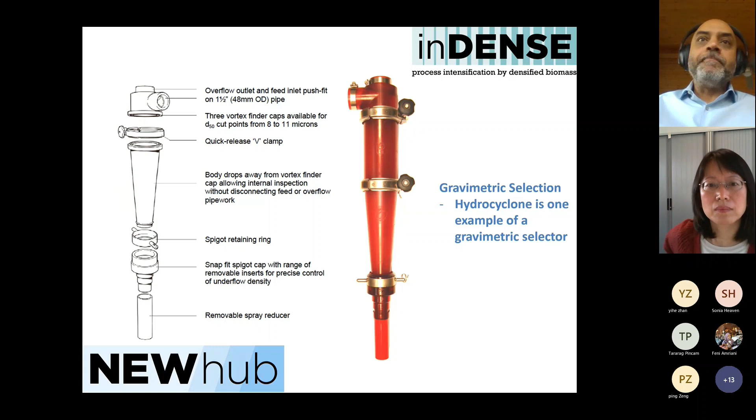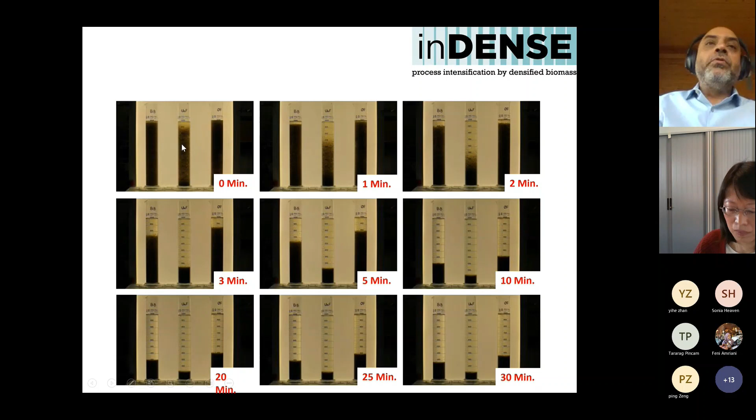We try to waste—in fact, we waste the overflow relative to the feed and the underflow. In 30 minutes you can see the difference as well, but you can also see the difference in 5 minutes.

Selective sludge wasting, which is what this is by physical classification, can promote aerobic granulation in almost any existing plant configuration. There are tens of thousands of CAS, continuous flow activated sludge facilities already built worldwide. There are IFAS systems already built worldwide, sequencing batch reactors, membrane bioreactors—so there's already this existing infrastructure.

So how do we actually use something like this, which is a hydrocyclone with a skid, to improve capacity by between 20 and 30%? Typically it's around a 30% increase in capacity of a plant. There are nearly 80 implementations worldwide for a technology that we've launched only in the past 5 or 6 years.

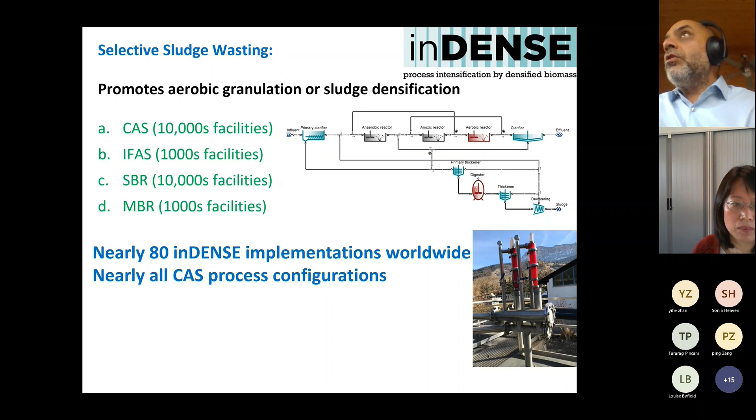So where does one place the hydrocyclone unit? One can put the unit in the waste stream. Let's assume you have a continuous flow activated sludge process with an anaerobic selector, or maybe even just simply an anoxic selector. One would eliminate the regular waste stream, take a small amount of RAS, typically 150% of what you would need to waste. The 1x will go into the waste stream, and the remaining 0.5x is returned. That contains the dense material.

But really what we are doing is out-selection. We are out-selecting, or deselecting, the poor settling material. By deselecting it, we are hopefully retaining the good settling material.

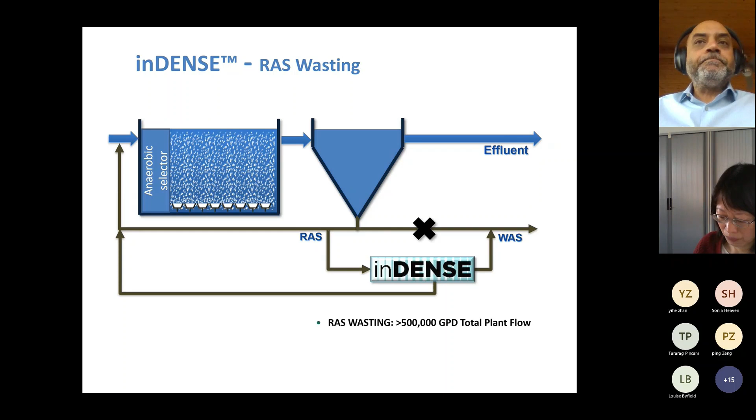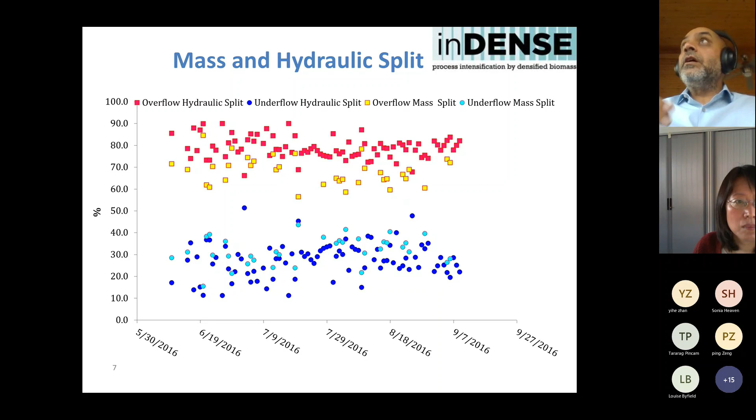This one shows the typical hydraulic and mass splits associated with our approach. You'll see that about 70% of the flow is in the overflow, and about 30% is in underflow, giving that 1.5 factor that one needs to manage into the hydrocyclone system. So if you know your waste volume, then it's very easy to design this hydrocyclone system.

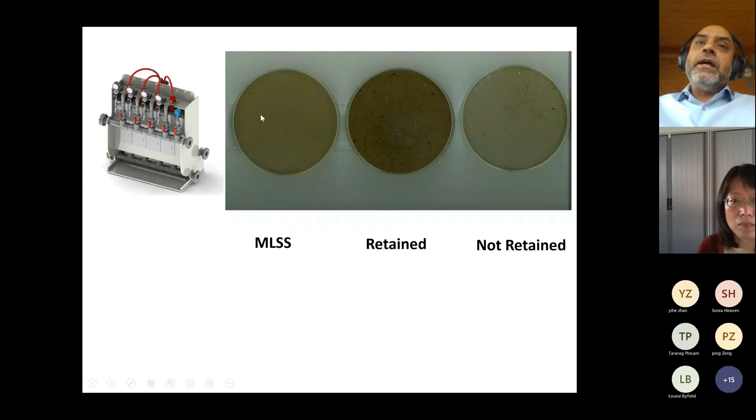And you can see in this PowerPoint slide, the granules are retained in the underflow. It's very fine flocs that go out in the overflow, sometimes filaments, depending on what your objectives are, and the mixed liquor in the feed.

Our approach is not to try and maximize aerobic granulation. Our approach is to try and get a floc-granule, what I would call a Goldilocks approach. We don't necessarily want to operate in a fully granular approach. We don't believe that's what we should try to achieve.

But we do try to achieve one, SRT uncoupling. That means the low SRT organisms might be present in the flocks in a properly designed system, the high SRT organisms in the granules. So it's very much similar to how an IFAS is operated, where the higher SRT organisms are on plastic media. Here, the higher SRT organisms are in the granules. The low SRT organisms are in the flocks. So it's this combination of floc-granule approach.

What we want to do is improve the mixed liquor solids. So we want higher MLSS inventory in the process. That's an objective, and one can do that by improving the settleability of the process, but we also want more active mixed liquor suspended solids. By doing this SRT uncoupling, we would have the ability to manage the active fractions associated with what we want to support in our process.

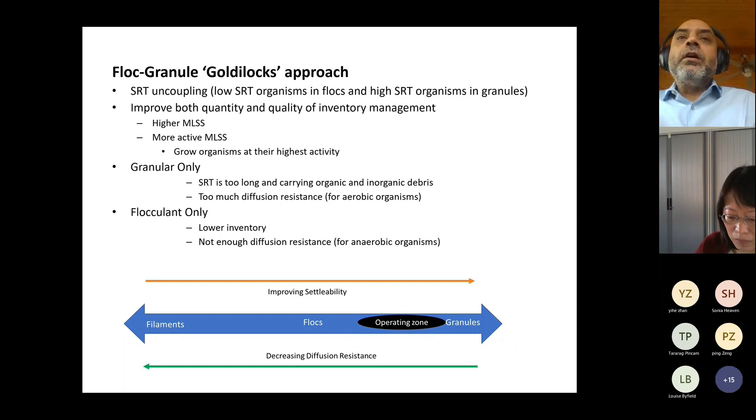Typically, we could have somewhere in the order of 2 parts granule to 1 part flock in our inDENSE systems. And our SRT uncoupling could be such that the SRT of the flocks could be in the ballpark of, say, 5 days, and the SRT of the granules could be in the ballpark of 25 days. So that's the uncoupling that one could envision.

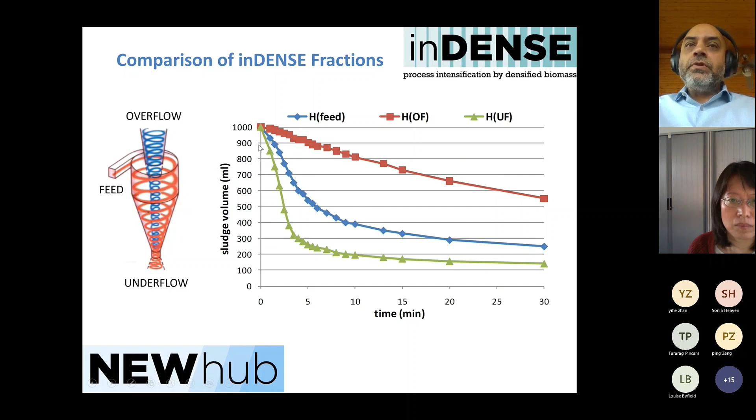This is an SVI test where we have 1,000 mils of mixed liquor being subject to settling, and the feed is in the blue, the overflow is in the red, and the underflow is in the green, and you can see the difference.

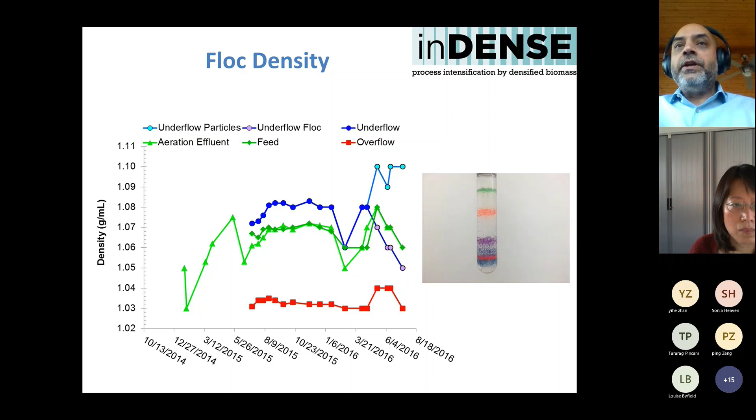This is the sludge volume index at one of the plants in Soyen. This is somewhere close to Munich in Germany, where the blue is the feed, the red is the underflow, and the green is the overflow.

Over time, many folks ask, if I'm wasting bad settling sludge, will my dewatering be impacted? But in reality, that's just a transitionary period. Over time, the overflow SVI actually is better than sometimes the feed SVI. So over time, the SVI gets better for all three fractions: the feed, the underflow, and the overflow. While the feed SVI could get down to 60 milliliters per gram, the overflow SVI is also not too bad, in the 150 milliliters per gram range or so.

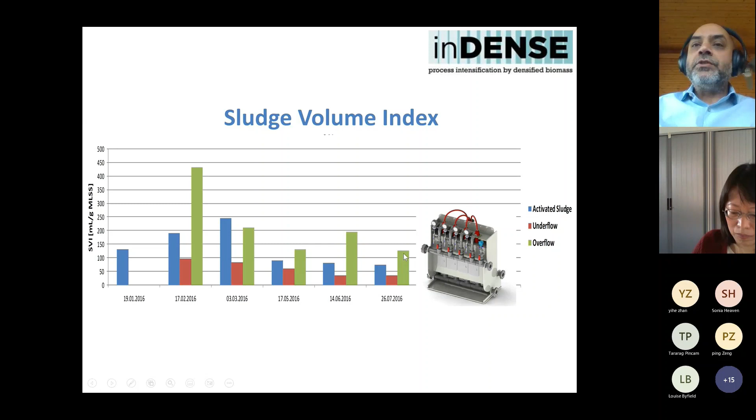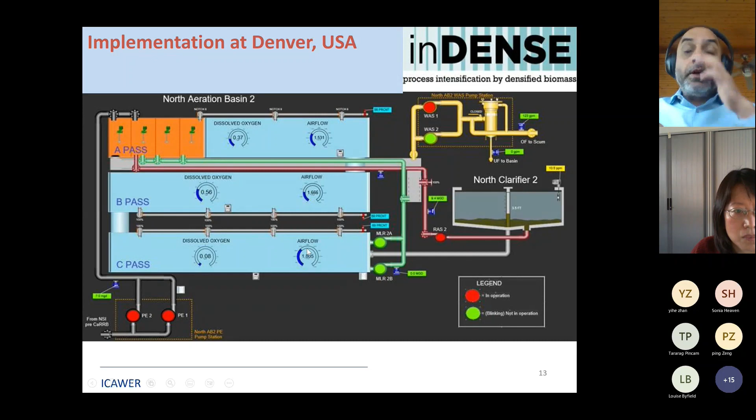We've implemented inDENSE in an A2O configuration, and this is an example of an A2O type configuration in Denver, where we have an anaerobic zone, anoxic zone in the first 2, and then the aerobic zone in the rest of the process.

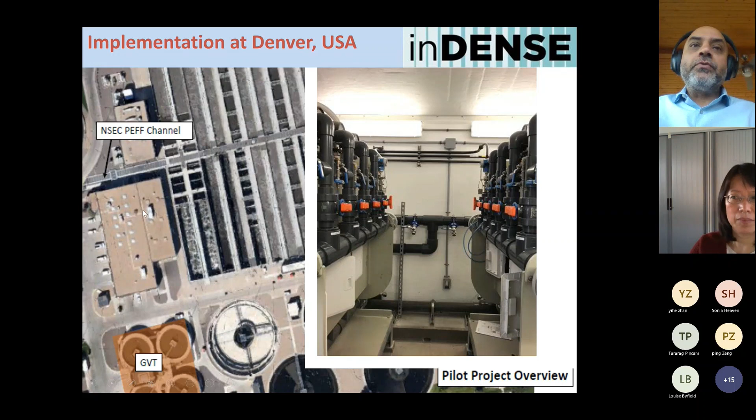And these are the hydrocyclone skids in Denver. There are 8 of these hydrocyclones in that skid for this train.

At this plant, what we see is, for example, there's a control train, the full-scale AB4 SVI, which is in red, could be as high as 160 or 180 milliliters per gram. And then as we start the inDENSE, you can see the SVI starts dropping, down to anywhere between 60 and 80, sometimes 100 milliliters per gram, depending on what your starting SVI was.

What you also see, which is important to note, is an improvement in the clarifier blanket levels. The clarifier blankets go from, in this case, as high as 3.5 feet to below 2 feet. And in almost every plant we've operated with inDENSE, we see our clarifier solids concentrations, our thickening function, improve.

So our clarifier solids concentration increases. At our plant in Strass in Austria, the solids concentration in the underflow is as high as 1.5 to close to 2%. And so what that does is you recycle less water, so you can reduce your RAS. Typically our RAS can go down to between 25 and 30% of Q.

By reducing your RAS flow, you actually increase your driving force. You increase the hydraulic capacity of your process because now you're sending less RAS flow, and so your forward flow can compensate for that, as well as your driving force. It's less dilute, so the driving force of your substrate to get into the granules improves. So not only do we improve the SVI, we improve our thickening, and those are actually complementary and create that virtuous cycle.

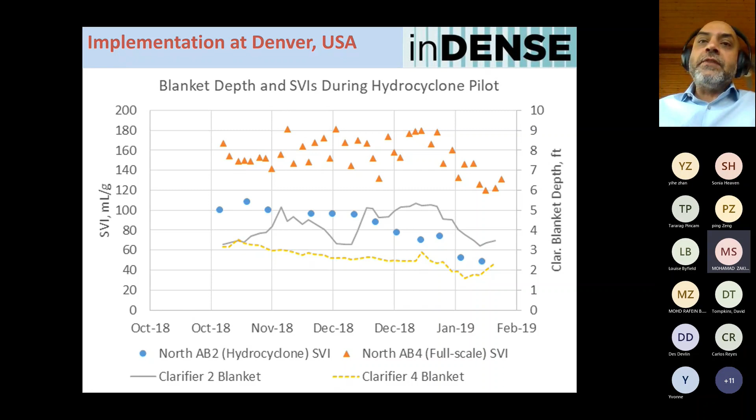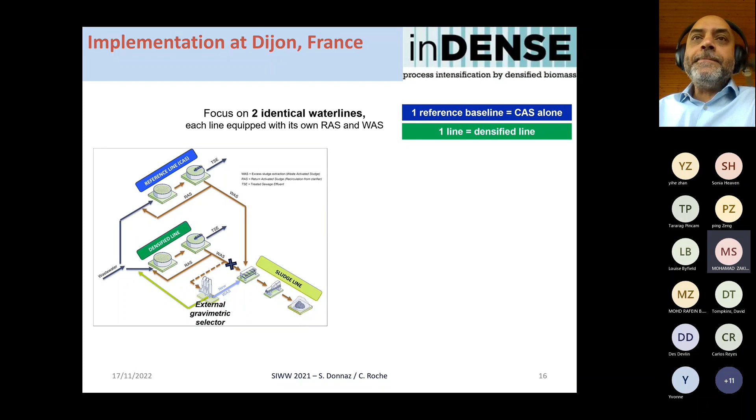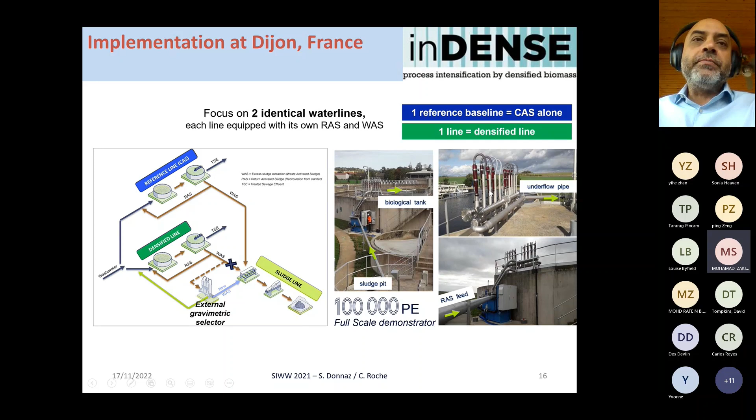This is an example of another A2O plant in Dijon, France, where they had a control line and a densified line. In this plant, you can see the hydrocyclones in the top right portion of the figure. It's an oxidation ditch plant with an anaerobic selector.

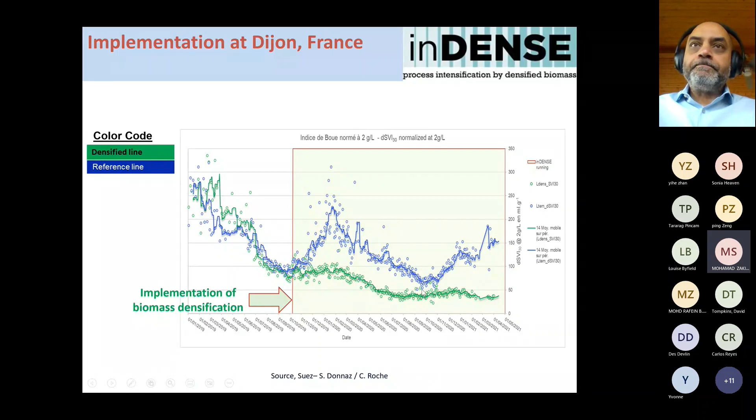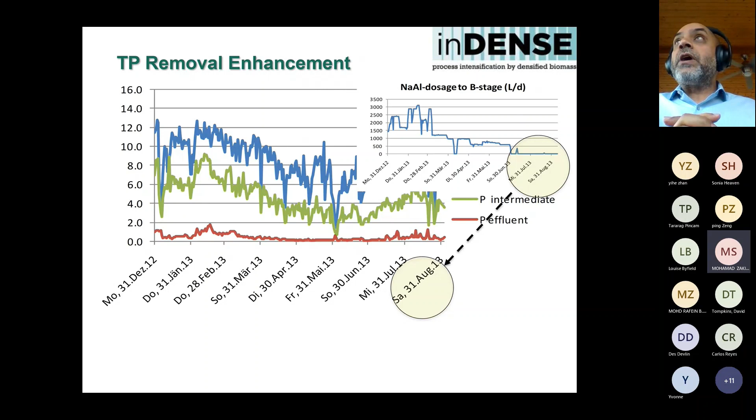We've implemented inDENSE in combination with using chemicals such as aluminum. We have a plant in Ephrata, Pennsylvania, where we add chemicals and do BioP simultaneously in the process to get low SVIs. We don't have too many of those applications, but we've even implemented inDENSE under conditions where the phosphorus limits are quite stringent, trying to manage both BioP and ChemP in the same plant.

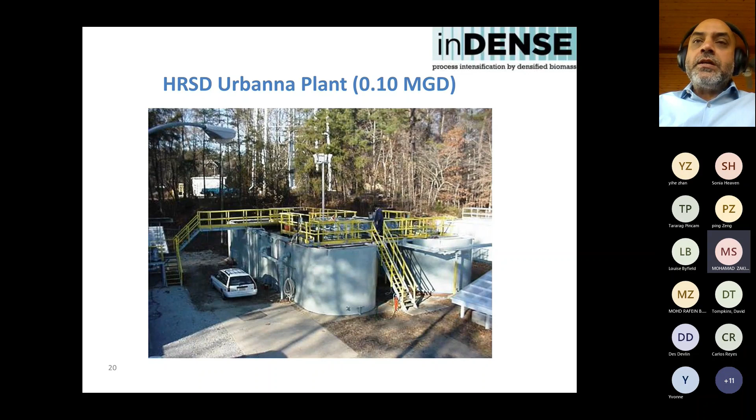We've also just started implementing inDENSE in non-BioP systems. This is an example of a plant with a classic MLE type approach. This is the Urbanna plant at HRSD, a very small 0.1 MGD plant where we first tried inDENSE with an MLE approach, modified Ludzack-Ettinger approach. Some people may call it just an anoxic process with an internal mixed liquor recycle.

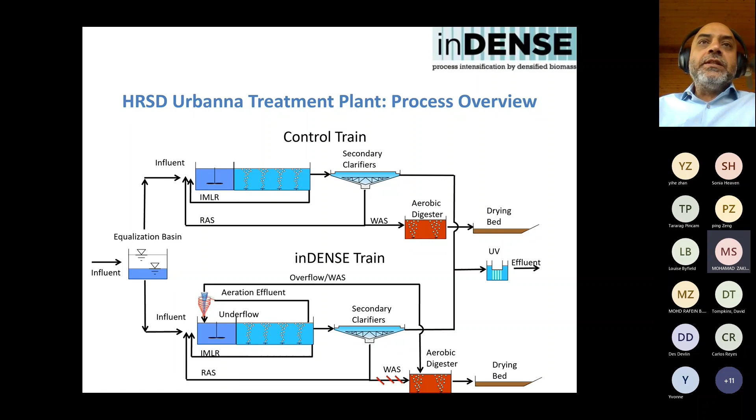We had a control train and an inDENSE train at this plant, the small plant with the hydrocyclone skid there. You can see that in the inDENSE mixed liquor, in the effluent of the aeration mixed liquor, in the control train, the settling velocities are in the ballpark of as high as 1 to as low as 0.2 meters per hour, while the hydrocyclone train maintains fairly reasonable settling velocities of about 1.5 meters per hour.

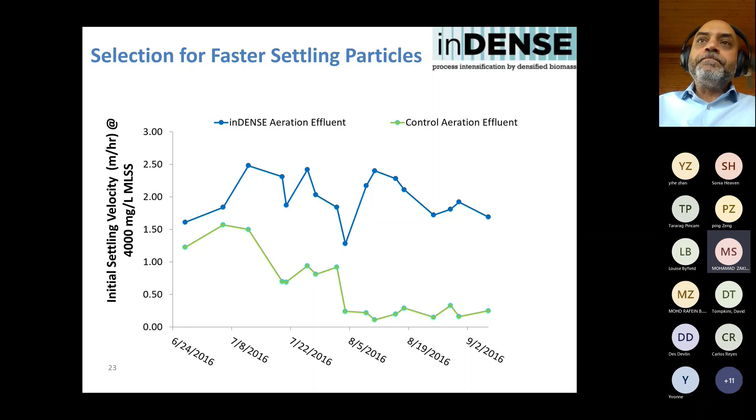This is another larger project for an MLE plant, and here there's an anoxic selector. The anoxic selector is 15 minutes. It's a project implemented by Jacobs at the Upper Occoquan Sewerage Authority, and this is a combined plant.

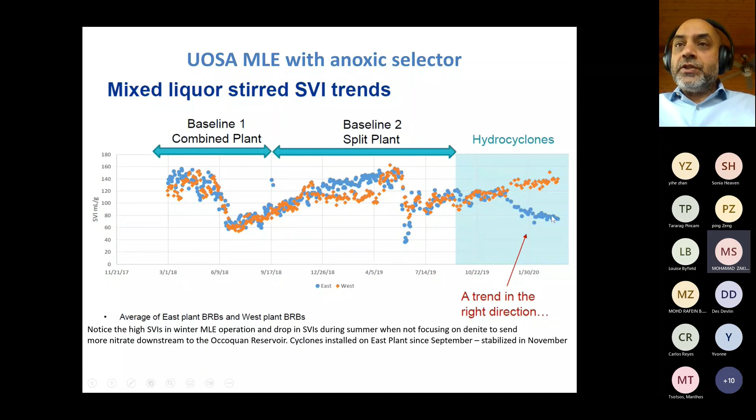So this is about 1 year worth of data of the combined plant, then almost 1 year worth of data of a split plant, and then with the implementation of the hydrocyclones you can see an improvement in SVI associated with that plant relative to the control train.

At this plant, they used a particle size analyzer using laser diffraction to understand what was the particle size separation between the control and the inDENSE stream, and the overflow and the underflow.

The west is the control train and the particle size distribution of that train, and then the east is the inDENSE train, and you can see that the particle size moves to the right.

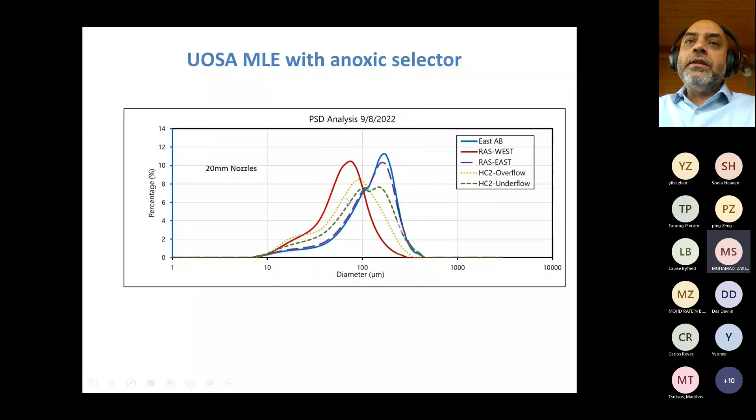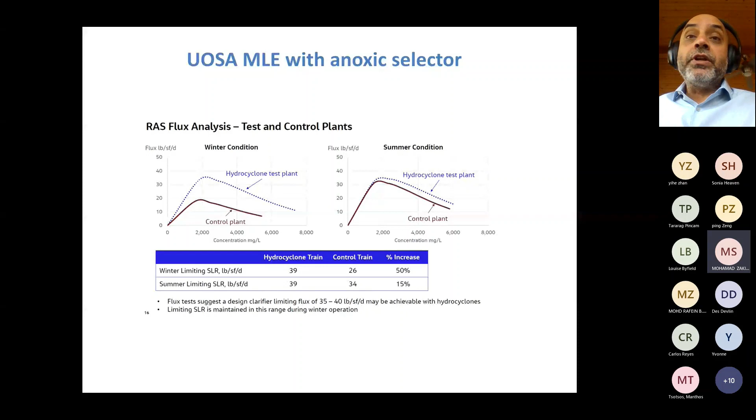This is an AO plant, an anaerobic followed by an aerobic plant. The aerobic approach was operated in an SND mode, simultaneous nitrification-denitrification mode.

This was a Brown and Caldwell project in Pueblo, Colorado, where there's an anaerobic zone, but this aerobic zone is operated in an SND mode, and with AVN as a controller.

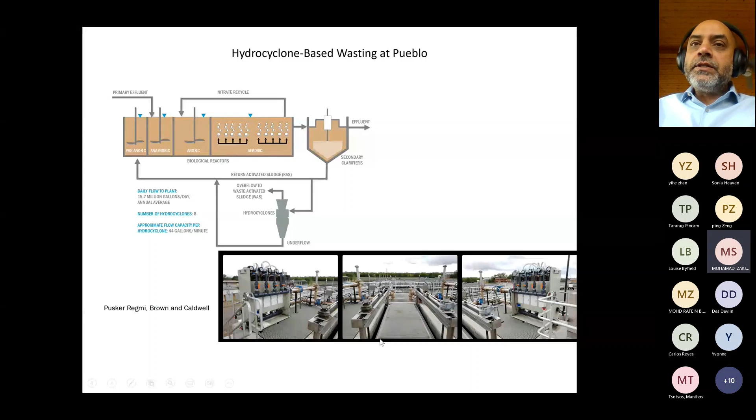Brown and Caldwell is, I believe, calling this their approach of intensifying treatment using SND, AVN, and hydrocyclones. It really simplifies the process flow configuration of the plant.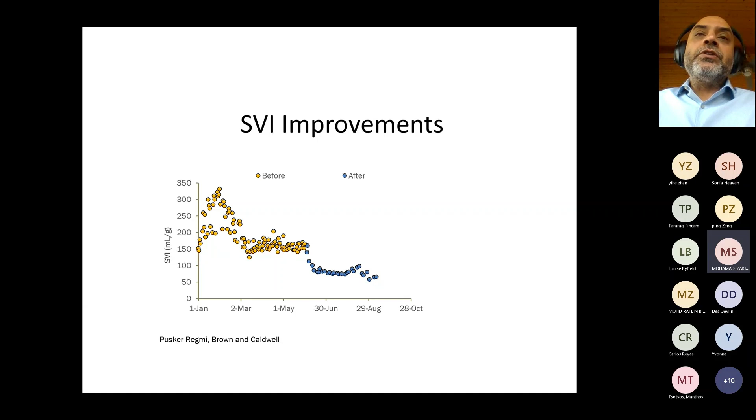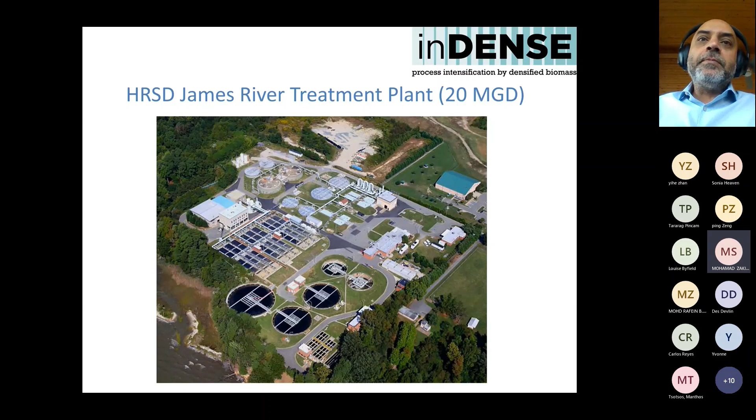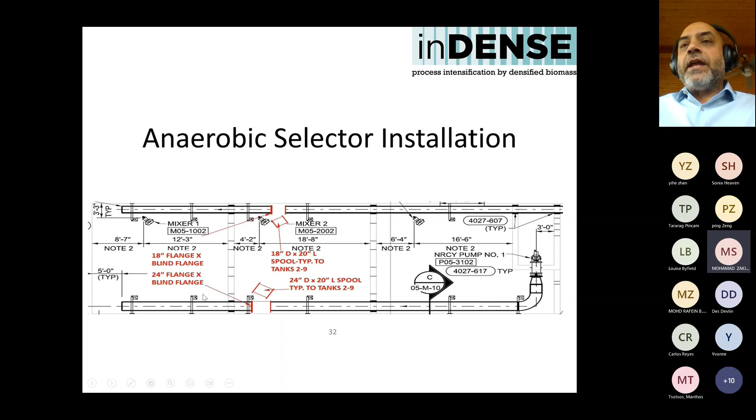We've also implemented inDENSE in an IFAS train. This is the James River plant at Hampton Roads Sanitation District, where inDENSE is implemented in an IFAS plant, where we have an anaerobic selector followed by an IFAS zone in an A2O configuration. We've implemented inDENSE in an SBR, a modified SBR approach.

This is a plant configuration in Soyen. There's a modified SBR called a BIOCOS system, where there's an aeration tank followed by two clarifiers, and there's an anaerobic zone that is typically added around here.

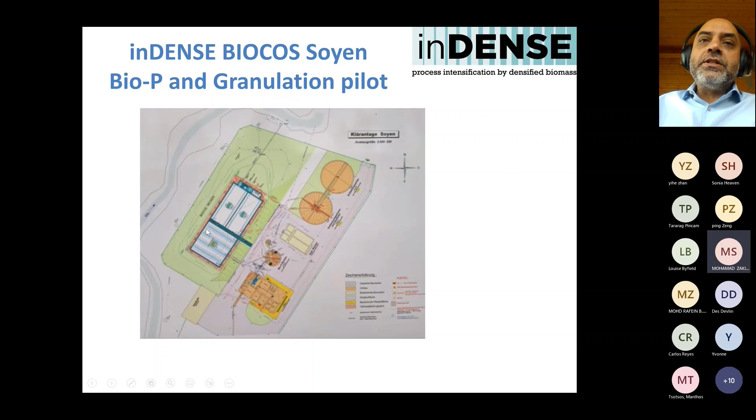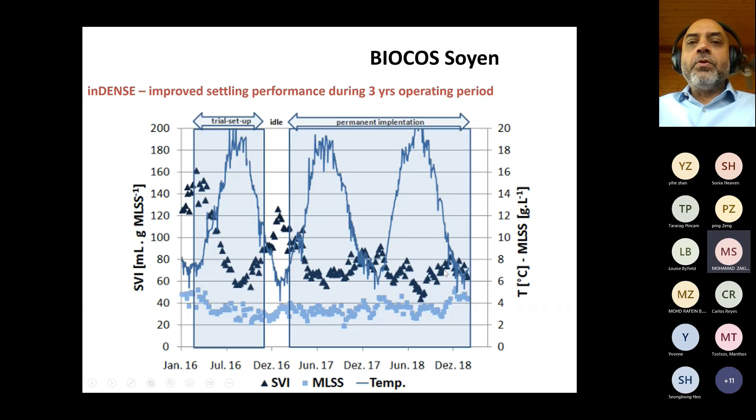This is the Soyen plant, and you can see this is before the setup. The idea is when a permanent installation of inDENSE was being implemented, and this is the SVI going up to 160 in the winter, going back down, and then with the inDENSE, the SVI is much more stable over several years. We've implemented at one location in China, at a biogas plant there as well.

And then finally, step feed. In fact, I saved the best for last. Step feed is actually our favorite configuration of implementation of inDENSE because it doesn't have the IMLR, the mixed liquor recycle. Step feed by itself does some flow intensification, and so combining the flow intensification of step feed with inDENSE is very synergistic because it's less plug flow.

Sorry, it's more plug flow than a typical MLE type configuration. This is an example of a plant where we converted an MLE configuration where nitrate is recycled into a two-pass step feed configuration to get pretty much the same output in terms of TN and TP.

Using step feed, we converted 10% into an anaerobic zone, and the remaining 40 each, then 40% into an alternating aeration, intermittent aeration, anoxic-aerobic combined zone.

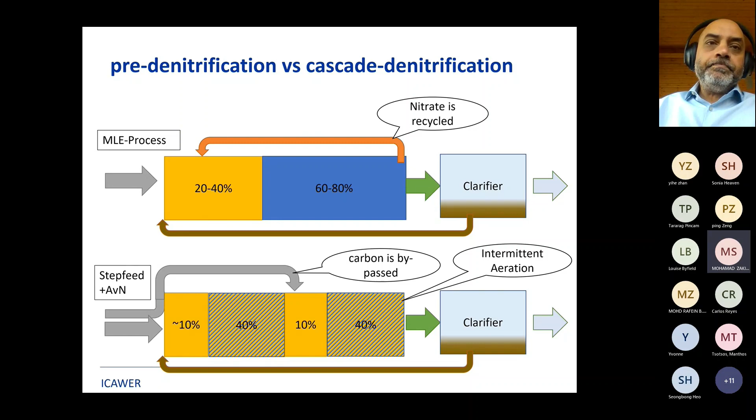This is an example of that plant in Alta Badia in Italy, where we are now at 6 to 7 grams per liter of TSS in our inDENSE stream.

This plant has an AAA settler that precedes the inDENSE stream. The intensification has been huge at this plant because we not only do carbon redirection using the AAA settler, but we also have the inDENSE doing the intensification in the biological step.

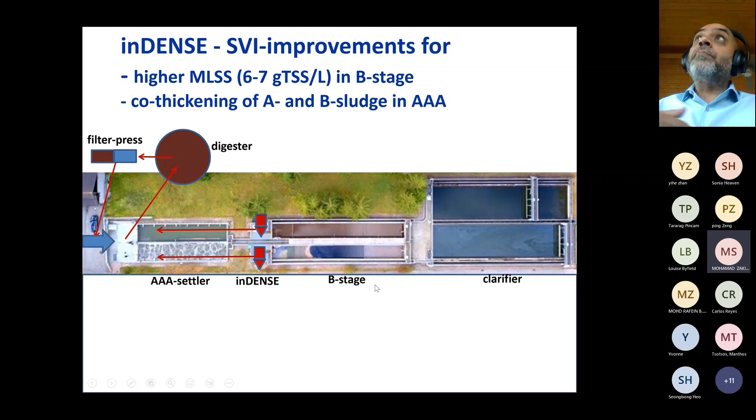The combination of AAA and inDENSE can do intensification, but also help create energy neutral plants because we send the carbon to anaerobic digestion.

inDENSE with MBR. We have licensed the use of inDENSE with MBR to the ZeeWeed membrane, which is now owned by Veolia WTS.

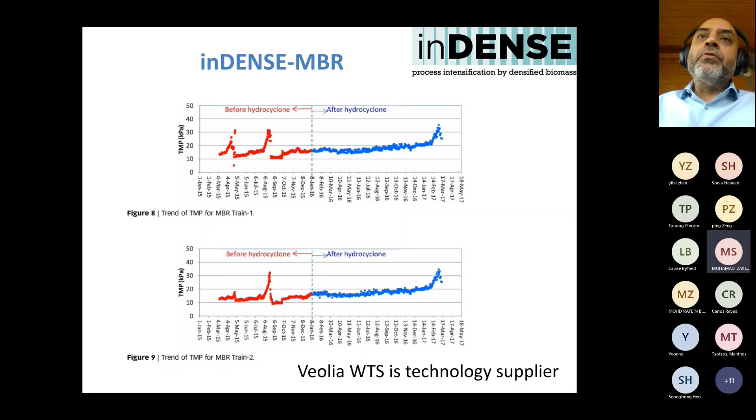And again, the concept is the same. If we can out-select and get rid of the fines that will typically foul the membrane, then we can have, perhaps, we don't know yet, longer membrane life, less fouling, but even perhaps an increased flux rate. We don't know all of that yet, but we certainly have seen improvement in, or reduction in, fouling.

That's pretty much it. It's a very simple approach. What you need is a cyclone mount with pressure transmitters and flow meters.

We strongly recommend AvN control because that helps with making the process more plug flow. One last thing, anaerobic zone modifications such as adding a simple baffle wall and improving hydrolysis, inline hydrolysis in your anaerobic zone, becomes important, especially in the winter, to release the RBCOD. That will then be important to create the large granules, to get the driving force to produce granules.

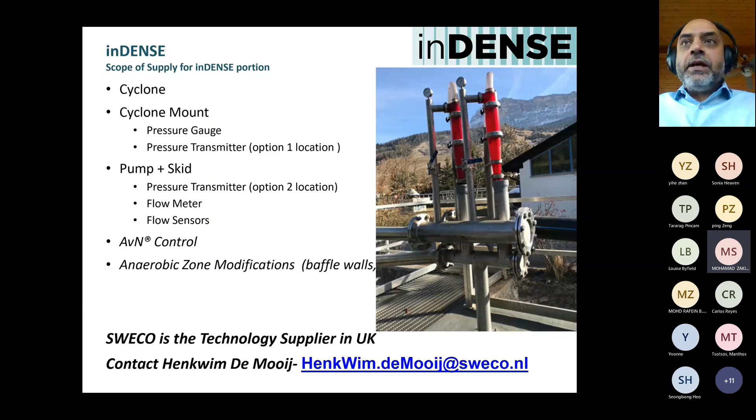So the mods for CAS configuration are not that substantial, and could be easily retrofitted in almost any plant. And with that, I'll open the floor for questions.

Thank you very much for your interesting talk. I think this intensification is quite different from the Nereda based process, because you don't just want to form the granule, you just want to improve the settling ability and take advantage of both flocs and granules. So I would say, yeah, the opposite.

We want to actually get the best of both worlds, and we're transparent, right? Our approach is fully transparent. It's not a black box, and I think it can be implemented in almost any configuration. It's not tied to a phosphorus removal configuration.

Okay, so we have a question from the chat. It looks like it takes time to change the underlying biology. Do you speed that up by using lots of the hydrocyclone to start with before taking over with fewer later?

Yeah, you're right. A minimum of 3 SRTs are needed. We would prefer to start in the summer or spring. Springtime is a good time to actually start this concept, because you can drop the SRT in the summer and get ready for the winter.